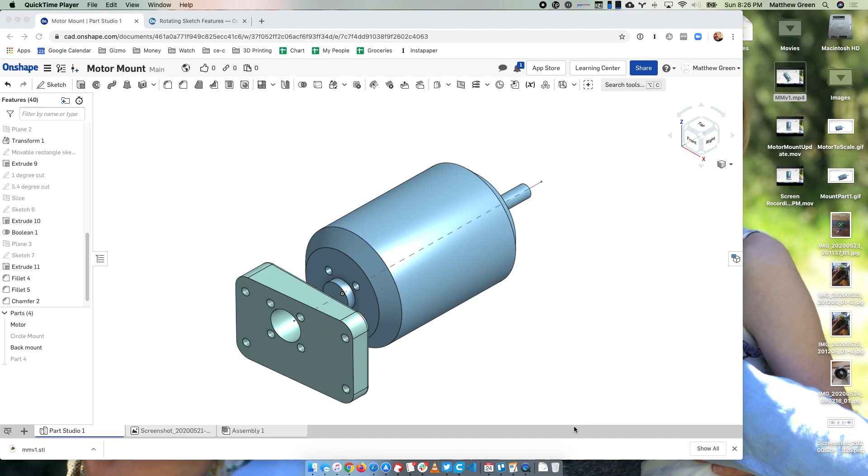As I was looking more at these videos or photos, I realized that the way this new motor is oriented, with the long shaft facing out, I was thinking about this wrong. There's this internal shaft on the green motor here, and when I was looking at this diagram, I was thinking that's what the prop's going to get attached to. But I think that's actually wrong.

I think what's happening is this outer can spins—there's a name for that, I know you know it, I just can't remember it. So when I built my mount, I built it to attach to what I'm calling the back. But I think actually the mount is supposed to attach here, and then there's some other additional attachment you add here, and then there's a shaft to which the propeller connects.

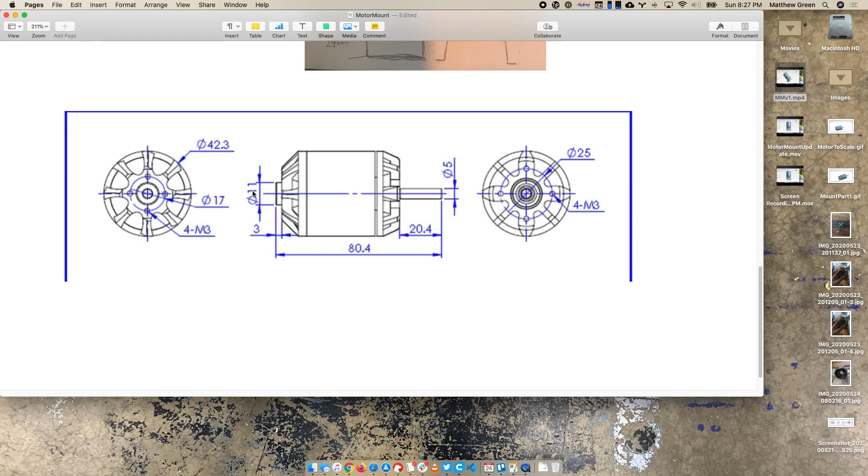I think that's correct, because as I look at this, there's got to be some way to attach the long... I don't have the words, man, sorry—this long additional shaft to which the propeller attaches. There's probably something similar here, because I've noticed there's this long shaft below, and then another one here.

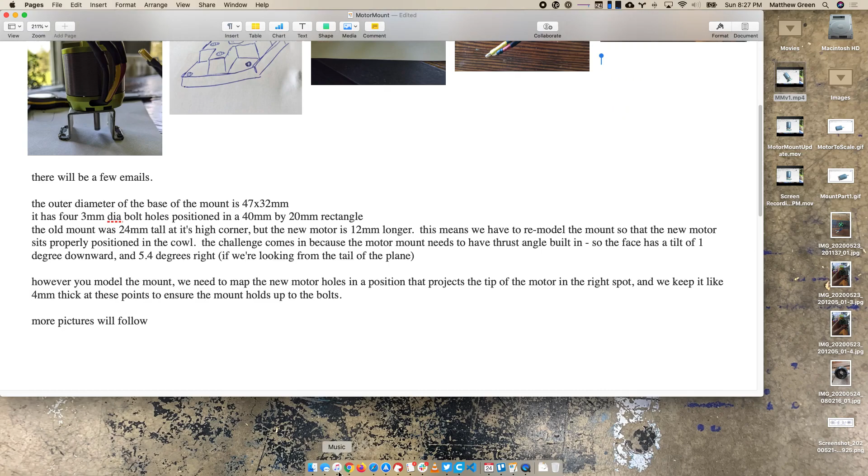So I know you held this in the correct orientation—obviously that's how this was mounted. So I think I just talked myself into this thing being backwards. What I think that means is, here it is attached backwards. Essentially what I need to do is take this concept with the angle being correct, that I showed you in the previous video, and rebuild it from the other side.

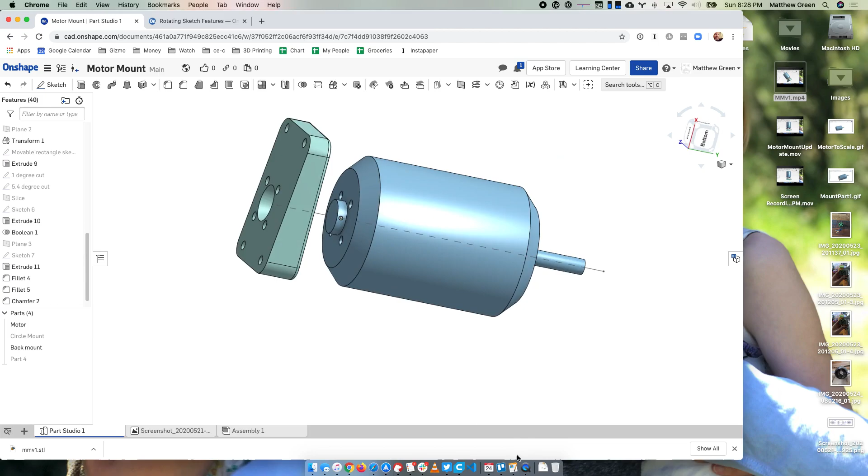You mentioned in text that the bolt pattern was too narrow. Well, that's because of how they were spaced on this document—there was a 17 mil diameter, this one is a 25 mil diameter. So as long as this 25 mil diameter, on which these outer bolts—these outer 3 mils—are placed, is accurate for the new motor, I can essentially build this thing to attach to the other side and then try that out.

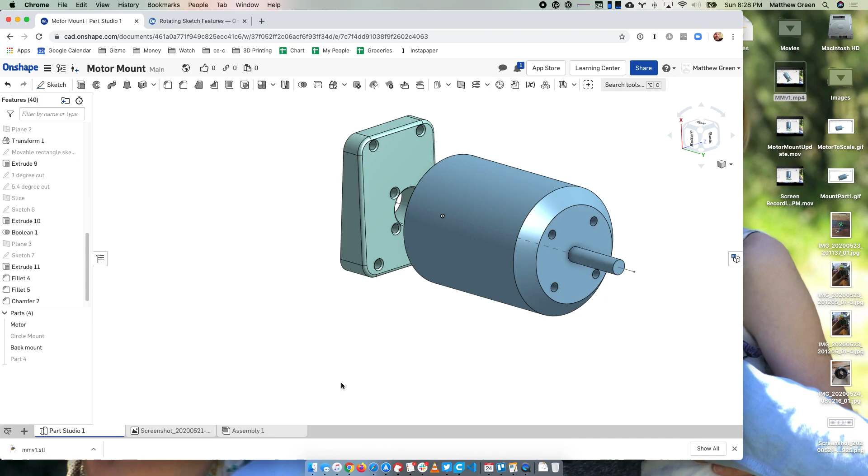Is that accurate? Am I thinking about that correctly? That's the first question. The second question is, I think I asked it in the first video—these internal 4 points that attach to the motor, which obviously I'm going to build from the other side, what is their relationship to the outer 4 connections to the bulkhead?

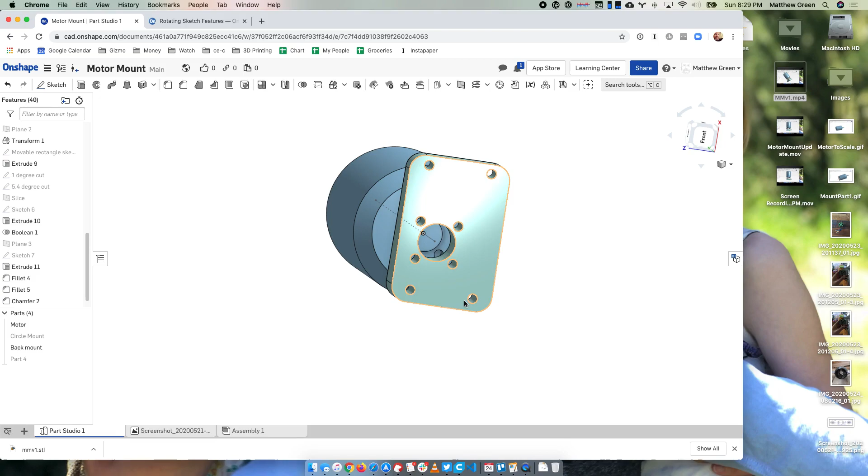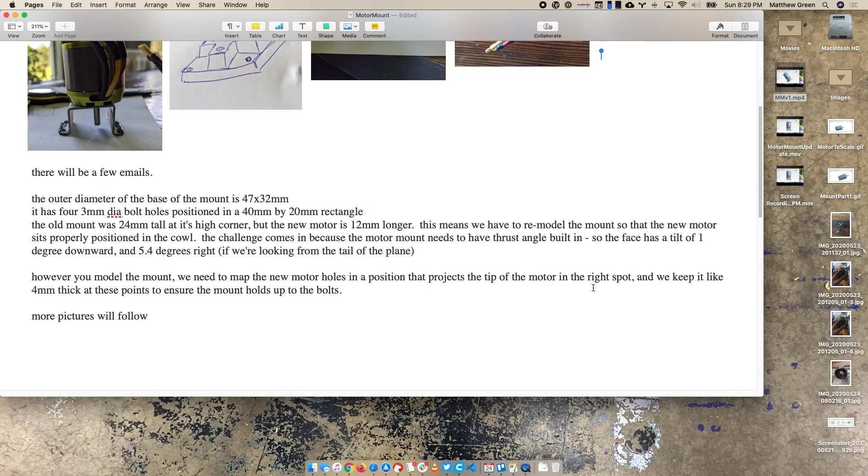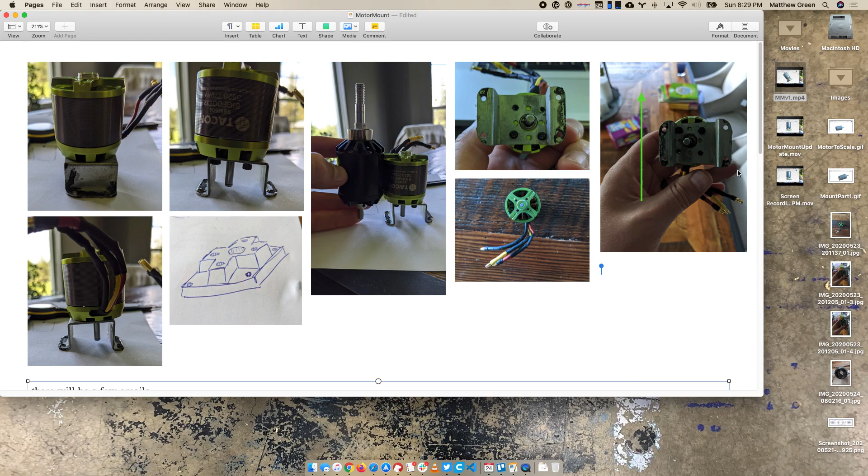I need help figuring that out because I'm guessing at it by looking at these pictures—this one and this one. But I don't have measurements, I don't think. I have measurements of height—we're trying to cut this 12 mils off this thing. I have 47 by 32, which I'm interpreting as the outer rectangle. This 40 by 20, I'm interpreting as 20 being the distance from the center here to here, and 40 the distance from the center here to here.

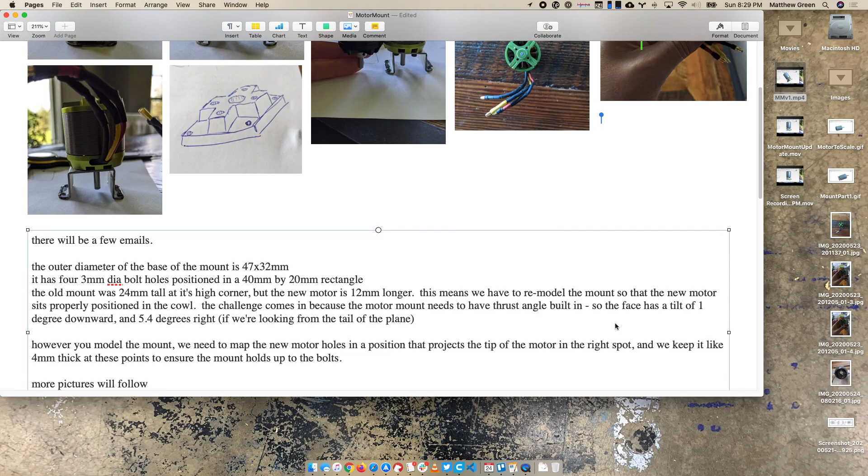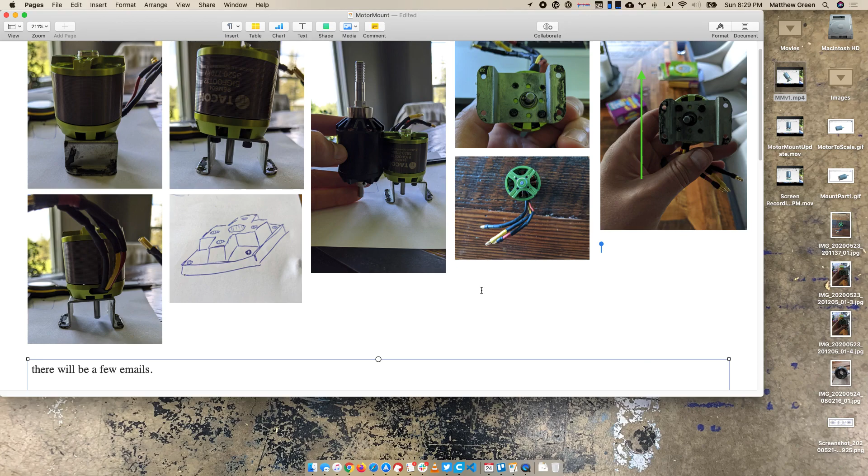But you have this rectangle, and then inside it another rectangle, and I don't know how the inner rectangle relates to the outer rectangle. So I need some clarity on that. And then I also need to know what the screws look like—you've got these 4 sitting here. As you mount to the bulkhead, how is the adapter we're building going to be held to the bulkhead?

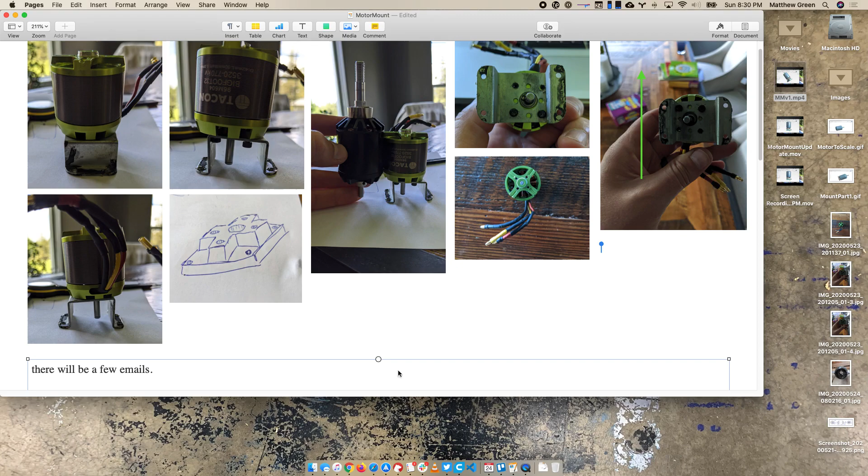A related question—these look like machine screws, which is how I've attached motors in the past, that have big thick heads. So as long as the bolt portion can pass through the hole here, there has to be some way to recess this head in there and still get to it. So I'll need some dimensions on screws and attachments as well. If I had all those things, I could just grab the calipers and make all this happen, so I might need to just get the parts from you.

Anyway, fun project, learning a lot. Getting much better at 3D modeling, learning how to do these planes things. So this has been fun. Thanks for letting me work on it.